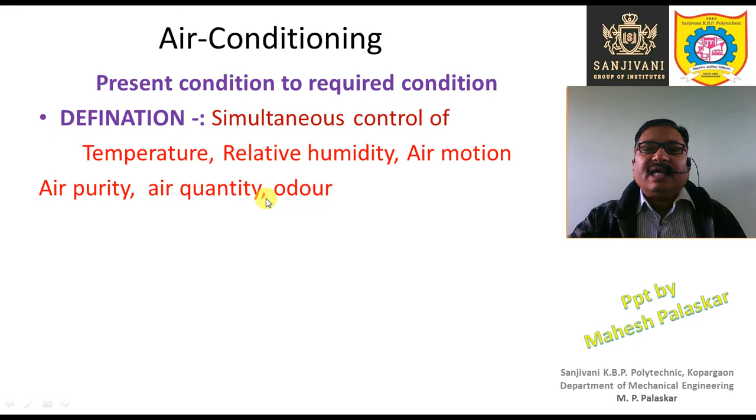These parameters are temperature, relative humidity, air motion, air purity, sometimes even air quantity or the density or the pressure of the air, and also in some cases the odor or the fragrance of the air. So all these factors are simultaneously controlled, and that is nothing but air conditioning. So simultaneous control of temperature, relative humidity, air motion, air purity, air quantity, odor is called as air conditioning.

Now air conditioning may be comfort air conditioning or industrial air conditioning. So for human comfort, mainly air conditioning is used. So what are the conditions, what are the values of these various parameters for human comfort? The temperature should be between 21 degree centigrade to 25 degree centigrade for human comfort, and we are maintaining the relative humidity between 40% to 60% so that the human beings feel comfortable. Then the air motion should be between 5 meter per minute to 8 meter per minute, right?

So if the temperature is between 21 to 25 degrees centigrade, then we neither feel hot nor we feel cold. And if the relative humidity is say less than 40% or less than 35%, then we feel very dry, right? Or if the relative humidity is more than 60%, then the environment becomes sticky. Our body becomes sticky and we start sweating. So that environment we can experience in places like Bombay. And the velocity of the air should not be too high, not be too less for human comfort. So it should be between 5 to 8 meter per minute.

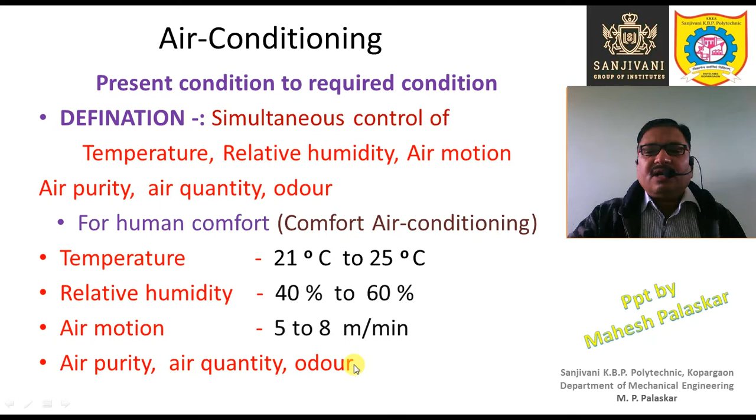Then the air should be pure. Then the air pressure or the quantity, that is the density of the air should be optimum, around 1 atmosphere. Then the smell, there should be no bad smell in the air, or the unnecessary unwanted odor should not be present in the air. So all these parameters, all these factors related with the moist air around us are controlled simultaneously, and that is nothing but air conditioning.

Now let us study the classification as well as the applications of air conditioning. So while studying the classification of air conditioning, we can also study simultaneously the applications of air conditioning. So first type of air conditioning is comfort air conditioning, or we can say one of the important applications of air conditioning is comfort air conditioning. Air conditioning is used for human comfort. So that air conditioning is used in the homes, in the hospitals, in the ICUs, in the restaurants, in the theaters, in the offices, etc.

Then next is the industrial air conditioning. So in various chemical, pharmaceutical and food processing plants, air conditioning is used, and that is nothing but the industrial air conditioning. So in various chemical, pharmaceutical and food processing plants like petroleum plant, tobacco processing, medicine, then the textile industries, then in the manufacturing of the beverages and the bakery products and the dairy products. Beverage means the various drinks like cold drinks which we are consuming in our day-to-day life. So in these various plants the air conditioning is used, and that is called as the industrial air conditioning.

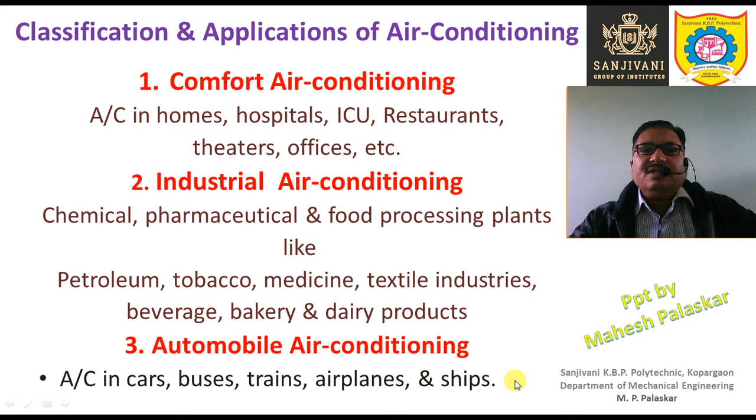So this was about the classification and the applications of air conditioning in short. Now let us study the basics of air conditioning. In the basics of air conditioning we are going to study psychrometry. Psychrometry is nothing but the engineering science which deals with the study of the thermodynamic properties or the psychrometric properties of the moist air, which is the working substance in air conditioning.

Then we are going to study Dalton's law of partial pressure, which states that the total pressure exerted by the mixture of gases is equal to the sum of the individual pressures exerted by each gas in the mixture of gases. Then we are also going to study the meaning of dry air, moist air and saturated air.

Dry air is that air which doesn't contain moisture or water vapor. It is the mixture of nitrogen, oxygen, argon and carbon dioxide. The percentage of nitrogen may be something like 78.03%, oxygen 20.99%, carbon dioxide 0.03%, and argon something like 0.94%. Then the moist air is nothing but the mixture of dry air and water vapor. When water vapor is present in the dry air, that is called moist air.

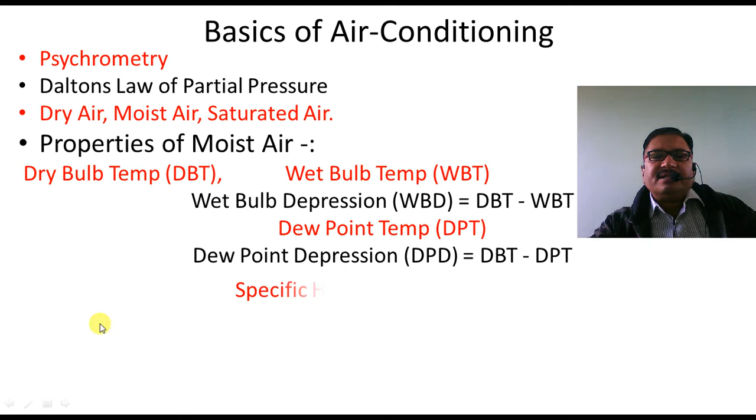The specific humidity we are going to study. Specific humidity is also called humidity ratio, moisture content or absolute humidity. So the specific humidity omega is the ratio of the mass of water vapor in a given sample of moist air to the mass of dry air in the same sample of moist air at the same temperature and pressure.

Then the relative humidity is the ratio of the mass of water vapor of the given sample of moist air to the mass of water vapor in the same sample if it would have been saturated at the same temperature and pressure.

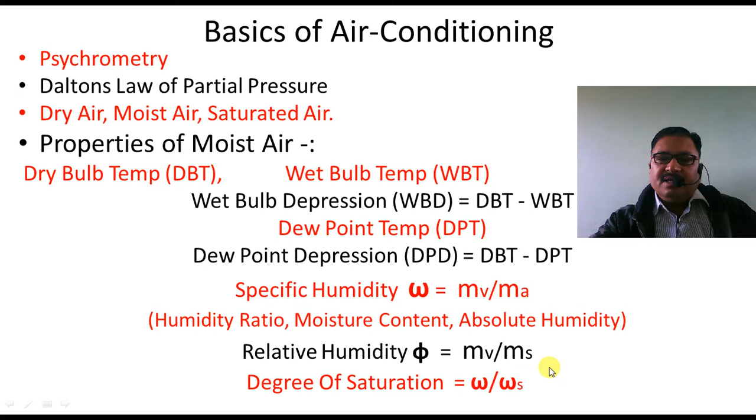Then the degree of saturation is nothing but the ratio of the specific humidity of the given sample of moist air to the specific humidity of the same sample of moist air if it would have been saturated at the same temperature and pressure. So let us study all these points in detail one by one.

So in psychrometry we are going to study first of all dry air. First of all we must know what is the dry air. So when we say the air is dry, that means air doesn't contain any moisture. That means no water is present, neither in liquid nor in the vapor condition. So generally water is present in the air in the vapor condition. So water vapor may be present in the air. So if water vapor is not present in the air, then that air is called as the dry air.

So then that dry air is the mixture of various gases like nitrogen, something like 78.03%, oxygen 20.99%, argon is 0.94%, carbon dioxide is 0.03%. Then the moist air is nothing but the mixture of dry air and water vapor, dry air plus water vapor. So moist air is the mixture of dry air and water vapor.

And now, after studying the moist air, let us study psychrometry. It is the branch of engineering science which deals with the study of the thermodynamic properties of the moist air. So we are studying the thermodynamic properties of moist air, and the branch of engineering science in which we are studying the thermodynamic properties or the psychrometric properties of moist air is nothing but psychrometry.

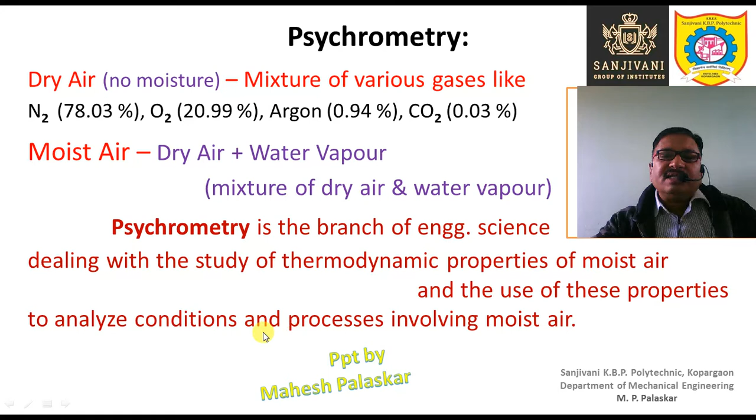And the use of these properties to analyze conditions and processes involving moist air is also psychrometry. So we are not only studying these properties, but we are using the study of these properties to analyze the various conditions and processes involving moist air. So various processes in which the change in the condition of the moist air is taking place, all these processes we are going to study under psychrometry.

Now the Dalton's law of partial pressure states that the total pressure which is exerted by the mixture of gases is equal to the sum of the individual pressures exerted by each gas. So when we have a mixture of gases, say gas number 1, 2 and 3 etc., and we add the partial pressures P1 plus P2 plus P3 of each gas, we get the total pressure which is exerted by the mixture of all these gases. So that is nothing but the Dalton's law of partial pressure.

And now let us define the saturated air. We have defined the dry air and moist air. So dry air doesn't contain any water vapor, moist air is the mixture of dry air and water vapor. But what is the quantity of the water vapor present in the air? That is important. And what can be the maximum quantity of water vapor present in the air? Does it depend on the temperature? Yes, of course, it depends upon the temperature.

If the temperature is high, then the air can hold more water vapor. Beyond a certain capacity, the air cannot hold water vapor. So the percentage of water vapor which is present in the air is limited, and that depends upon the temperature. So if the temperature increases, the capacity of the air to hold the water vapor increases.

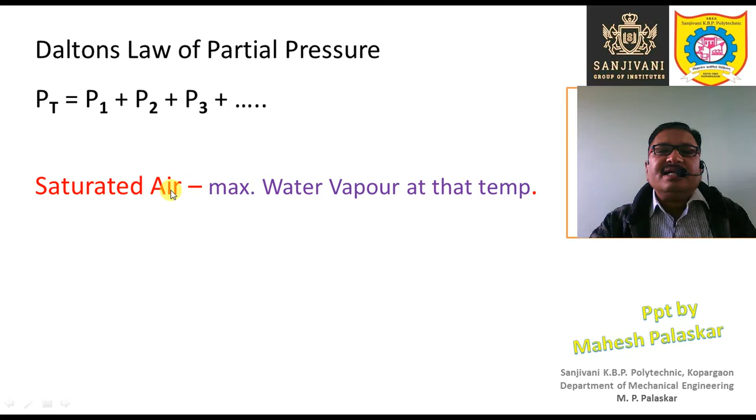So at a particular temperature, when the water vapor present in the air is maximum, then that air is called as saturated air. So we can't add further water vapor in that particular moist air if we don't increase the temperature. If the temperature is same, further addition of water vapor in the moist air is not possible, and that condition of the moist air is called as the saturated condition, and that moist air is called as the saturated air.

Now some other terms we are going to study in psychrometry. We are going to study the properties of the moist air. The first important property is the dry bulb temperature. In short, it is called DBT, or it is also indicated as capital T with the suffix db, small db is the suffix. So that is the notation of the dry bulb temperature.

So what is this dry bulb temperature? In other subjects, we just call it temperature. But in psychrometry, instead of just calling it temperature, we call it dry bulb temperature, because it is the temperature which is measured by a standard thermometer when its bulb is dry, or when the bulb is not affected by the moisture or the water vapor. That ordinary temperature, measured by an ordinary or standard thermometer, is called the dry bulb temperature.

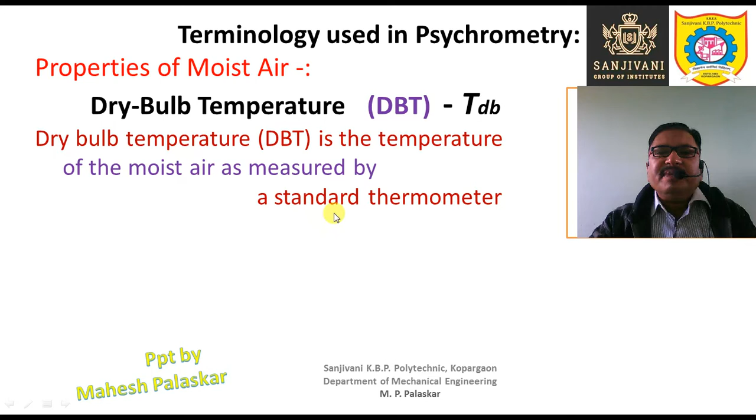So dry bulb temperature DBT is the temperature of the moist air as measured by a standard thermometer or any other temperature measuring instrument which is not affected by the moisture present in the air, or when the bulb of the thermometer is dry. So it is usually referred to as the air temperature. The air temperature is nothing but the dry bulb temperature. With dry bulb temperature, the sensible heat content of the air can be determined. So if you know the dry bulb temperature, we can easily find out the sensible heat content in the air.

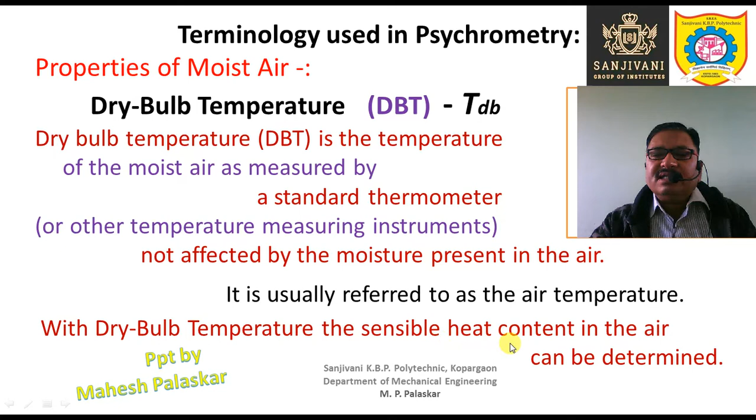Now next is the wet bulb temperature, WBT, or it can be denoted as capital T with suffix small wb. So what is wet bulb temperature? Wet bulb temperature is the temperature of the moist air as measured by a thermometer, but when a wet cloth is tied to the bulb of the thermometer and it is sufficiently exposed to the air. So a wet cloth should be tied to the bulb of the thermometer, and this wet cloth should be sufficiently exposed

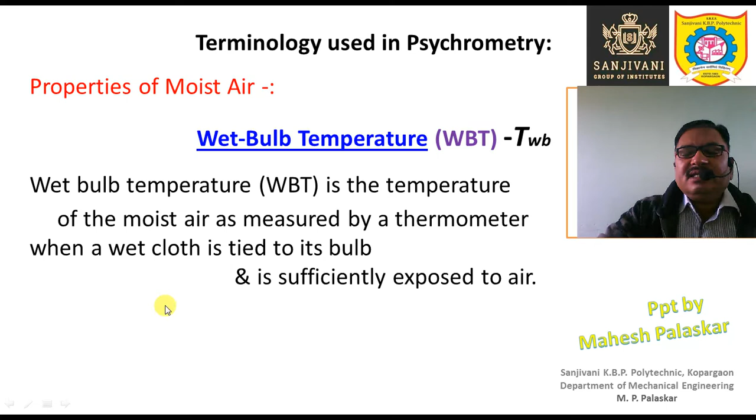to the air, or we can whirl this thermometer whose bulb is tied with the wet cloth in the air at a sufficient speed, so that there will be sufficient exposure, and the water present in the wet cloth will evaporate, and the heat of evaporation will be taken from the bulb, and that will reduce the temperature. Theoretically it is expected that the saturated condition of the air should be reached, and that temperature is called the wet bulb temperature. Now wet bulb depression is nothing but the difference between dry bulb temperature and wet bulb temperature. Wet bulb depression short form is WBD.

Now the dew point temperature, denoted by DPT or capital T with suffix small dp. Dew point temperature is the temperature at which water vapor in the air starts to condense if the air is cooled at constant pressure. So we are cooling the moist air at constant pressure. As the temperature decreases, the capacity of the air to hold the water vapor decreases. And a point reaches when, due to the decrease in the temperature, the air cannot hold the water vapor which was present in it. So the air will become saturated, and the excess water vapor will start to condense out.

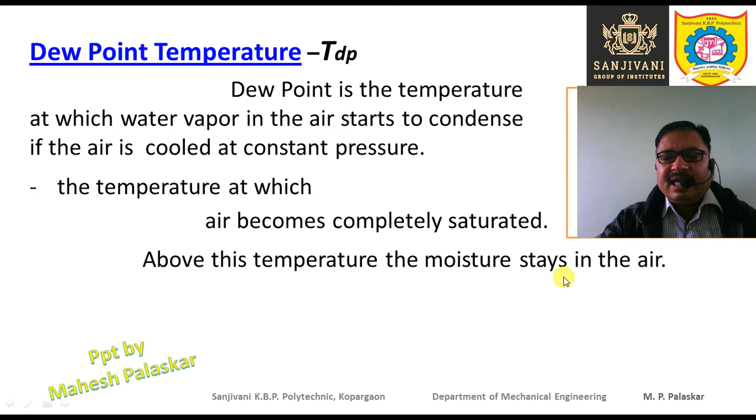So the temperature at which the water vapor will start to condense out from that moist air, if it is cooled at constant pressure, is called the dew point temperature. The temperature at which air becomes completely saturated is nothing but the dew point temperature. Above this temperature, the moisture stays in the air. If the temperature is increased, moisture will stay in the air. But at this temperature, moisture cannot stay in the air. So that is the dew point temperature. Dew point depression is the difference between dry bulb temperature and dew point temperature.

Now the next property we are going to study is the specific humidity. It is also called the humidity ratio, moisture content, or absolute humidity. It is denoted by omega. The specific humidity omega is the ratio of the mass of water vapor present in a given sample of moist air to the mass of dry air in the same sample of moist air at the same temperature and pressure. Or in other words, specific humidity is the amount of water vapor by weight present in 1 kg of dry air, or the weight of water vapor in kg present in 1 kg of dry air.

So if we take a mixture of air and water vapor, that is moist air, and measure the mass of water vapor, measure the mass of dry air, and take the ratio, in that ratio the dry air should be 1 kg. So the amount of water vapor by weight present in 1 kg of dry air is nothing but the specific humidity omega, or humidity ratio, or moisture content, or absolute humidity. So the moisture content of the air is expressed as the weight of water vapor per unit weight of dry air. Weight of water vapor per unit weight of dry air, that is nothing but specific humidity.

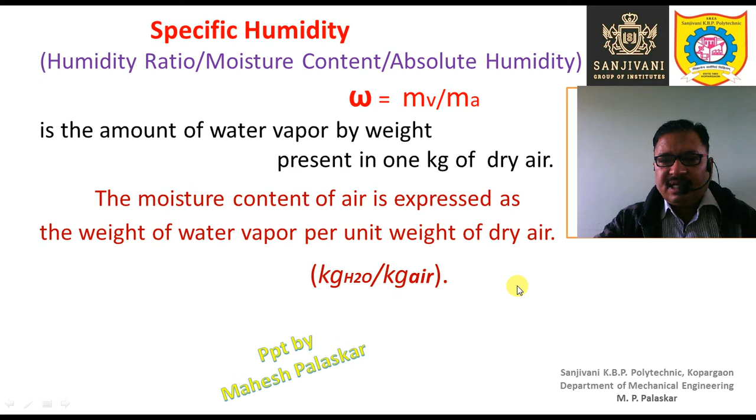So the weight of the water vapor present in kg to the weight of dry air present in also kg, right? Kilogram. That is nothing but specific humidity. Now next definition is the relative humidity. So relative humidity is generally expressed in percentage, right? So when relative humidity is 100%, that means the air is saturated.

Air is saturated. So relative humidity is the ratio of the mass of water vapor in the given sample of moist air to the mass of water vapor in the same sample of moist air if it would have been saturated at the same temperature and pressure, right? So relative humidity phi is defined as the ratio of the mole fraction of water vapor in moist air to the mole fraction of water vapor in saturated air.

This is one more definition. At the same temperature and pressure. Actually, these definitions are almost same. Instead of saying mass, here it is said mole fraction of water vapor. Now the relative humidity is also defined as the ratio of the partial pressure of water vapor PV to the saturation pressure of pure water vapor at the same temperature, that is PS, right? So the partial pressure of the water vapor to the saturation pressure at the same temperature, right?

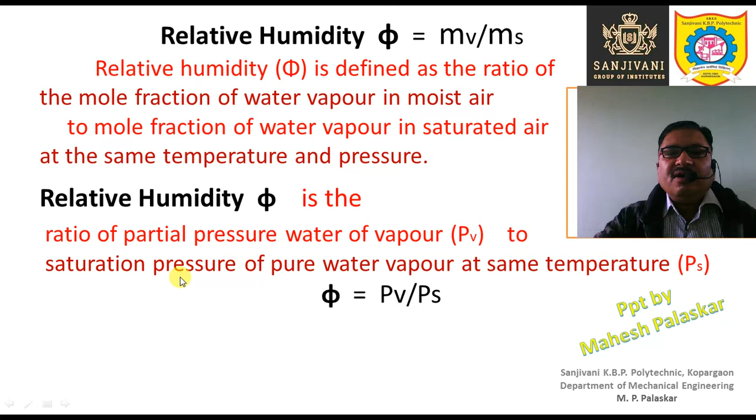So if the water vapor is saturated, then the pressure will be different, and that is called as the saturation pressure, and that ratio of these two pressures is also the relative humidity of the moist air. So relative humidity is normally expressed as a percentage. When relative humidity is 100%, the air is supposed to be saturated.

Now degree of saturation. Degree of saturation is denoted by mu. It is the ratio of the humidity ratio or the ratio of the specific humidity. So degree of saturation is the ratio of the humidity ratio omega to the humidity ratio of the saturated mixture omega S at the same temperature and pressure, right?

So this degree of saturation is the ratio of the specific humidities. Specific humidity of the given sample to the specific humidity of the same sample if that sample is saturated at the same temperature and pressure, right? So this degree of saturation is also defined as the ratio of the humidity ratio or specific humidity omega of the given sample of moist air to the specific humidity omega S of the same sample if it would have been saturated at the same temperature and pressure, right?

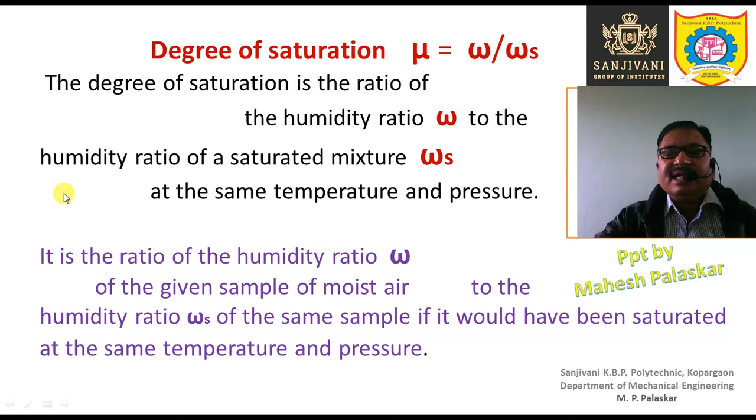So in place of humidity ratio, you can also say specific humidity or moisture content, because the meaning is same, right? So this is the definition of the degree of saturation. So we have studied almost all the properties of the moist air, and now we are going to study the psychrometric chart and how all these properties are represented on the psychrometric chart. Let us study the constant property lines on the psychrometric chart.

So first of all, what is a psychrometric chart? Psychrometric chart is nothing but a graph on which we can represent the various properties. We can represent first of all the condition of the moist air. The condition of the moist air will be represented by the particular point on this chart, right? And the processes will be represented by the lines or curves along with the arrows indicating in which direction the process is being completed, right?

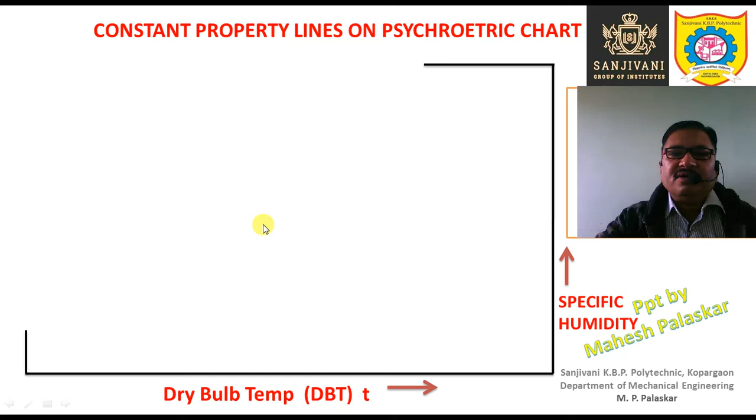So on the horizontal axis, dry bulb temperature or DBT is plotted on the psychrometric chart. Then on the vertical axis, specific humidity omega is plotted, right? Then we draw this horizontal and vertical line, and then we join these 2 points by a curve, and that curve is called as the saturation line or the saturation curve. So this curve is called as the saturation curve.

Now the constant property lines we are going to show. First of all, the constant dry bulb temperature line will be vertical, okay? So this vertical line is nothing but the constant dry bulb temperature line, constant DBT line, because the horizontal axis or the x-axis represents the dry bulb temperature. Dry bulb temperature is plotted on the horizontal axis. Therefore all the vertical lines represent constant values of dry bulb temperature.

So the dry bulb temperature at this point will be same as the dry bulb temperature at this point. That will be same as the dry bulb temperature at this point. On all the points dry bulb temperature will be same, okay? If we draw another parallel vertical line, then also the dry bulb temperature will be same, but the value will be different, right? It will be different, but it will be same along that line.

If this vertical line is drawn to the right, then the dry bulb temperature will be increased. If this line is drawn to the left, then the value of dry bulb temperature will be reduced, less dry bulb temperature, right? But it will be constant along the line. Okay, so this line is the constant dry bulb temperature line.

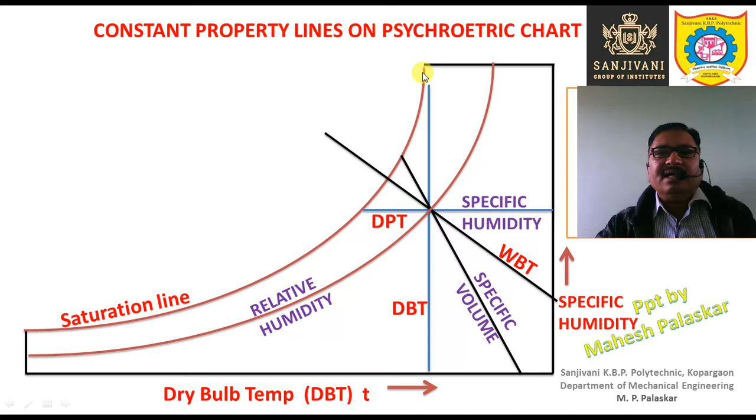So this curve we can say it is parallel to the saturation line. Saturation line means relative humidity is 100%. Air is saturated, so the air doesn't have further capacity to hold the water vapor. So air is called saturated air, right? But here this air is unsaturated, but the relative humidity will be constant. Suppose here the relative humidity is something like 60%, so here also it will be 60%, 60%, 60%. So along this curve, at all the points, the relative humidity will be 60% only.

If you draw another curve here like this, it will be less than 60%, but constant along the curve. If you draw a curve like this between these 2 curves, then the relative humidity will be more than this value and less than 100%.

So I have shown only one line each. In the actual chart there will be several such lines, right? It will consist of a large number of lines drawn in a dense manner, and that is the actual psychrometric chart. This is nothing but the skeleton psychrometric chart, in which I am showing you the sample lines, that is, the constant property lines. So this was the psychrometric chart, and we also studied the psychrometric properties. In the next class we will study the psychrometric processes.